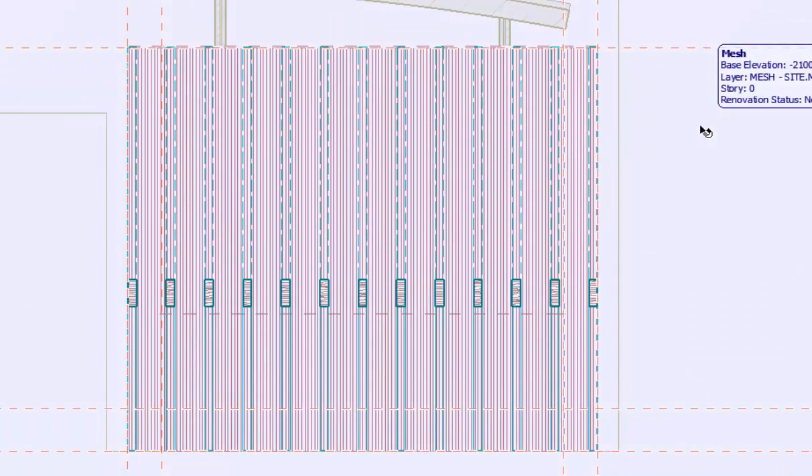Let's go to the ground level, select gallery level, and we're on our roof. We have to go into the section view again. We have to record 3 heights for our 3 support beams.

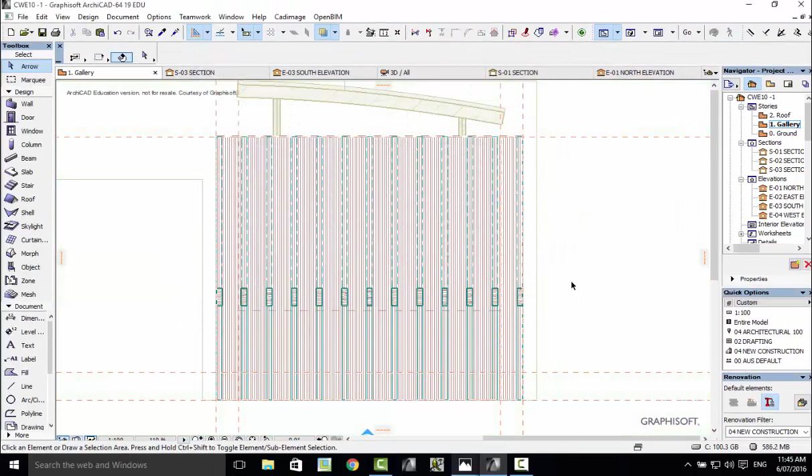Let's turn off the mesh, it's on layer mesh site. So we just go Control L, and mesh site, turn that off, and then it won't be a problem. Later on, we're going to turn off the roof so we can see just the rafters and the walls.

Let's go into our section view, and we need to record 3 measurements. Now we need the support beams to sit in the center of each wall. So we've got one wall, the other exterior wall, and the 4 posts.

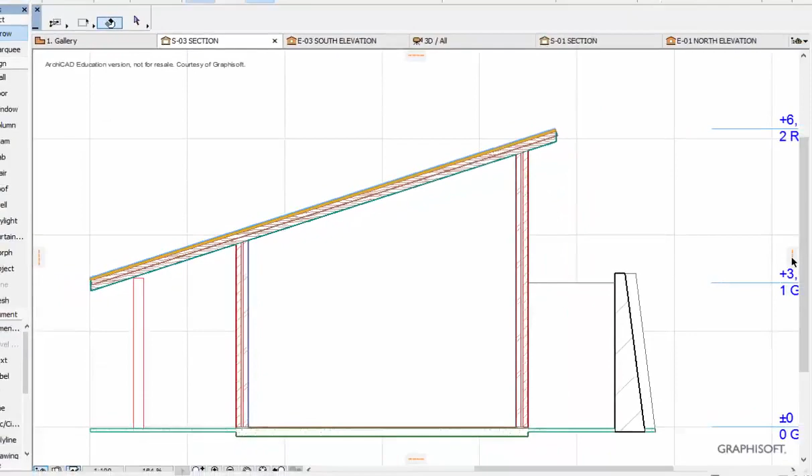Best way to do this is use guidelines. Let's bring in some guidelines and attach them to the outside of the 2 walls and the outside of the post. We need to get a center line.

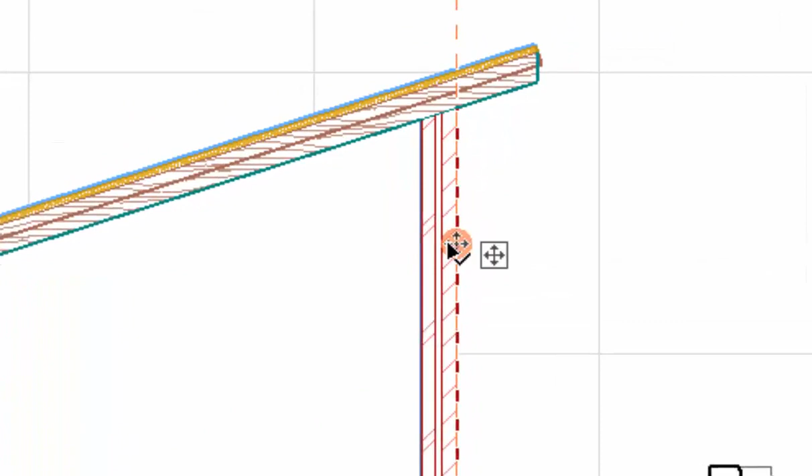If I zoom in a little, just grab the orange dot, and as it goes in, the thickness of our exterior wall is 250. So we need halfway, which is 125. Enter. There's our center point.

Now this one, we'll move this one in 125. There it is. 125. Enter. And the posts are 200, so we need to move this one in 100.

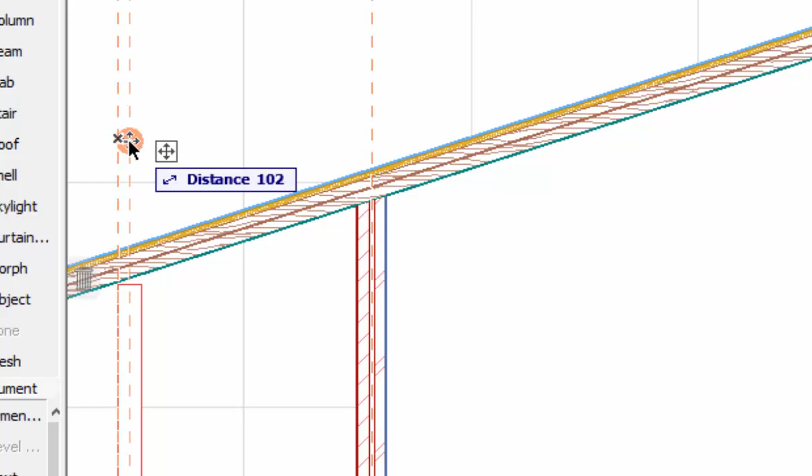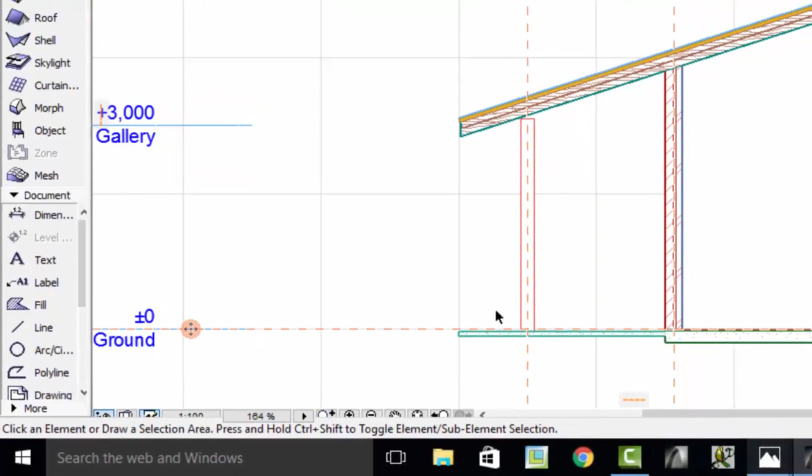Now they're in the center. We've got our ground zero. And just to make things easier, I'll put a guideline on ground zero. Just snap it to ground zero, and it's in place. So now it's easy to take the 3 measurements that we need.

You'll need to record these measurements because we need to do some calculations and write them in. We want to go from the bottom of the roof, which is here. Just zoom in. We need to go from the bottom of the roof. Here we see the bottom of our rafter, and this dark line here is the bottom of our roof. We're going to turn that off in a sec.

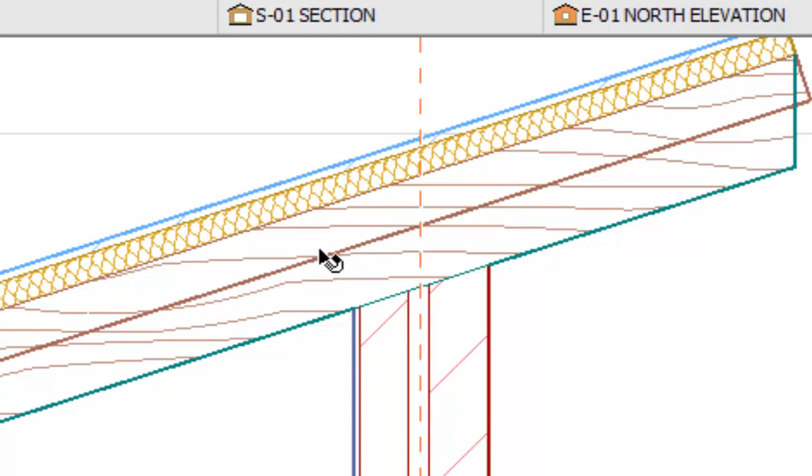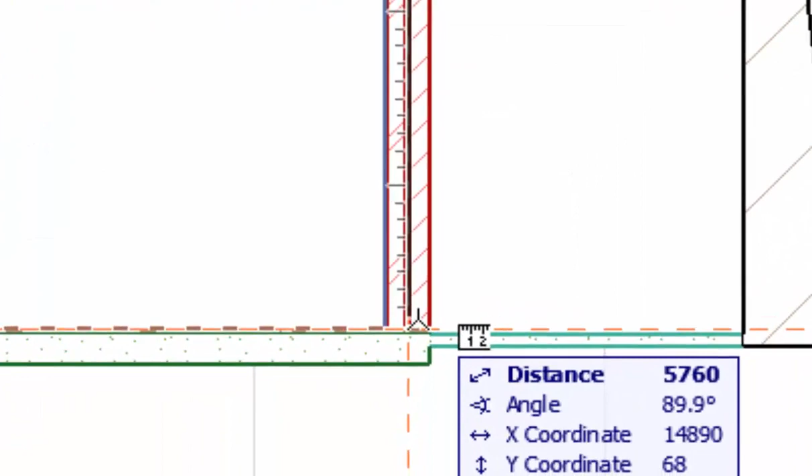Let's grab the measure tool. Go right in the center there and bring our line down. Now notice at the bottom you'll see an eye appear. Once that eye appears, you record that measurement. So it's 5848. Write down 5848. You can click it. All right, that's been recorded.

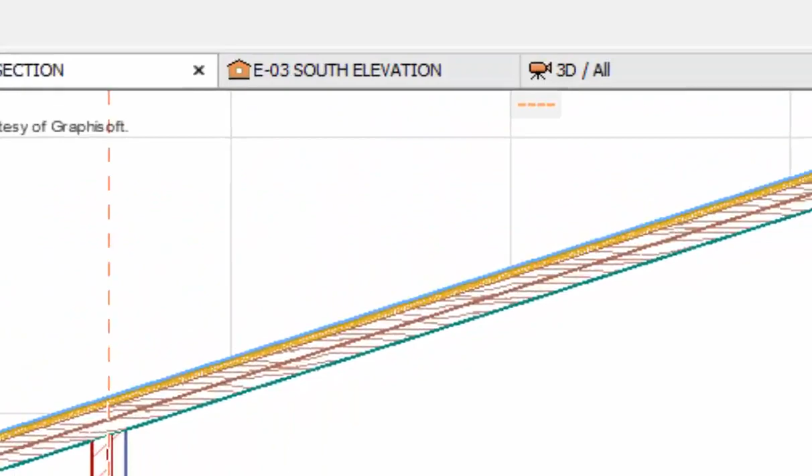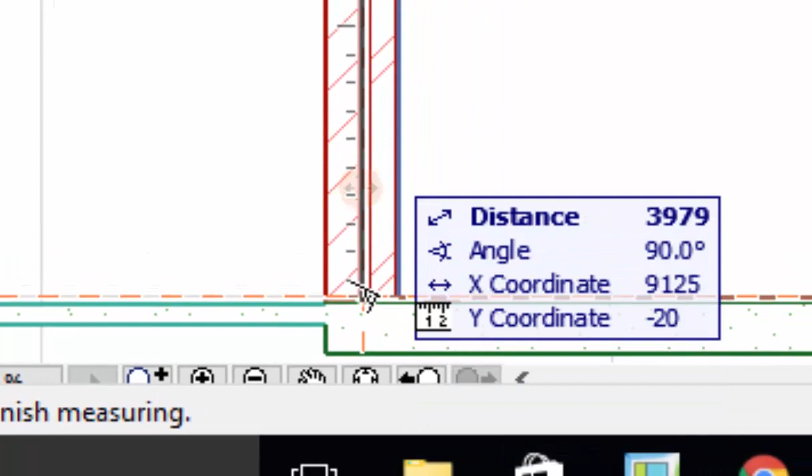Just hit the marker again. And we're going to come down and measure this wall here. We're going to put the second beam on. So hit the measure tool. I'll zoom in a bit. Now right in the center there. And as we come down to the bottom guideline, which is the 0 point, the eye will show. And that eye detects those lines, and it's 3979. So you need to record what the measurement is.

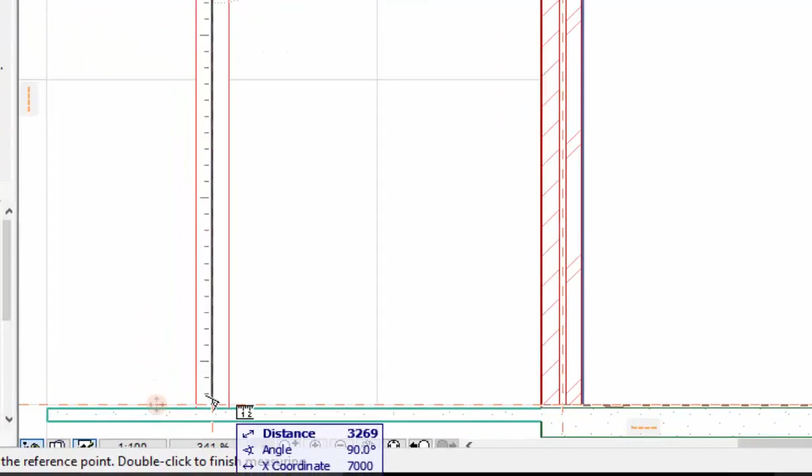Click the tracker again. And the last one here with the posts. Let's hit the measure tool, from that rafter right down to the 0 line. Ground zero is 3269. And we can turn the tracker off.

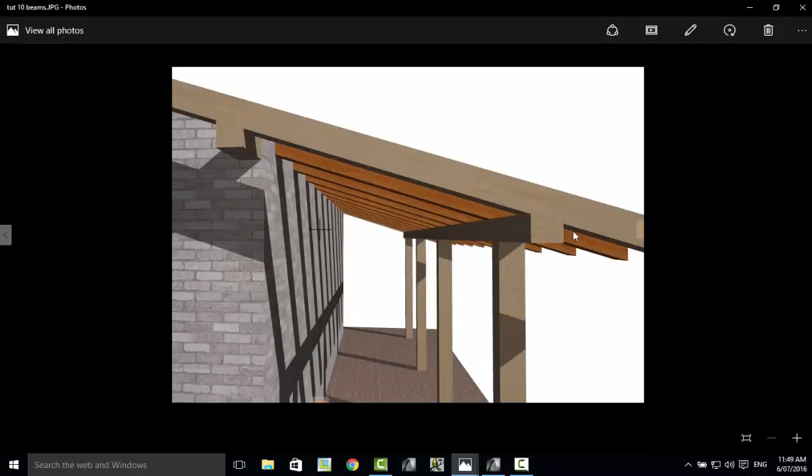Now once we've recorded those, we need to do a calculation. Now we see on here where this beam sits into the rafter, the height is right up here. So we need to do a calculation to get that edge on the edge of the rafter. And that calculation comes out at a minus 100. Already done that calculation, so we just need to minus 100 off each of the heights. And that should give our beam the correct position.

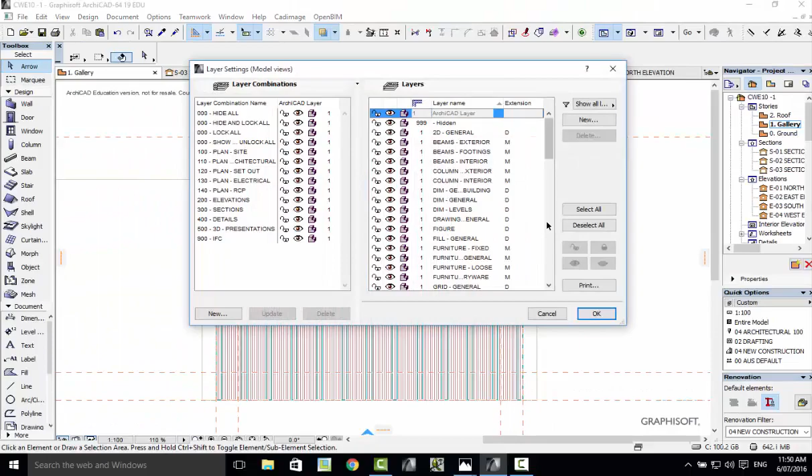So let's go back into the 2D view now. And let's turn off the roof. So if I select the roof, it tells me that the layer is on Roof General. So if we hit Control L, go into the layers, and come down and go to Roof General. There it is, and click the eye. It will turn the roof off, which exposes the walls that we need, and the rafters and the posts.

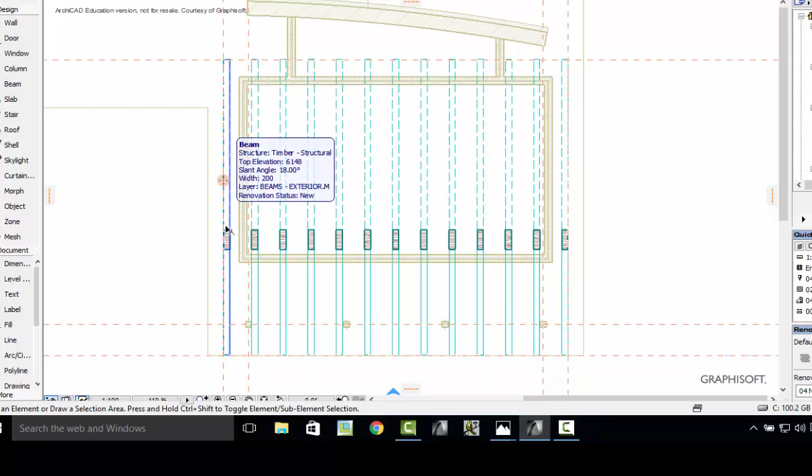You can see the outline of our building and our walls. We need to put some reference lines on here to give us the center point. Here we see some guidelines we already have in place. If you don't have any guidelines in place, then you need to put some on the edge of the outside of the rafter, one there, and one here. We also need to put guidelines in the center of each of the walls, which will give us the center point of where the support beam will go through from the edge of one rafter to the edge of the other rafter. So we need a support beam on this wall, on this external wall, and on our 4 posts.

Let's bring in the reference guidelines. Snap them to the side. Grab a guideline and snap it to the outside. Now we already have a guideline for the center of the posts, which we placed in previously. If you deleted that guideline, just put another one in. It needs to come in 100.

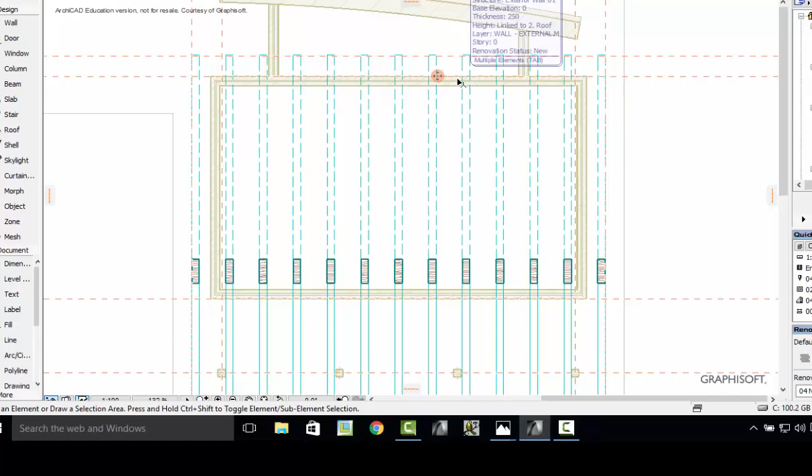We know that our walls are 250 millimeters thick, so the center of our wall will be 125. Grab the orange dot, drag it in and type in 125, enter. And down the bottom here, our line, drag in and type in 125, enter. Now we have our guidelines in place in the center of the walls.

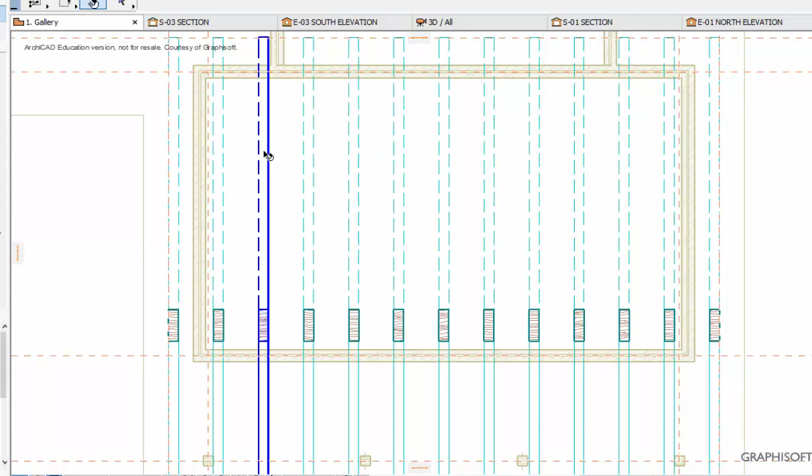We can insert the support beams. We've already adjusted properties for the rafters, and we're going to use those same properties. So let's grab the eyedropper, click on one of the rafters and select it, which opens up the beam tool, and let's adjust the beam settings. Now some of the settings are similar, same size.

The only thing we're going to change is the inclination - it's horizontal, the beam is horizontal. The other thing is there's no offset. We want the line in the center of the beam to be the center of the guideline, so press 0 there, so there's no offset. It's going to be exactly in the center.

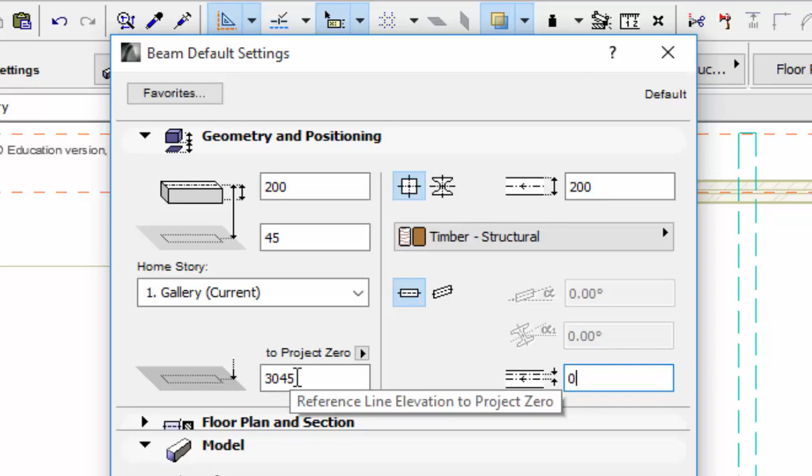The only thing we need to adjust is the height. The first height that we took was 3145, so if we minus 100 off that, it's 3045. So once I've placed that in, everything's good.

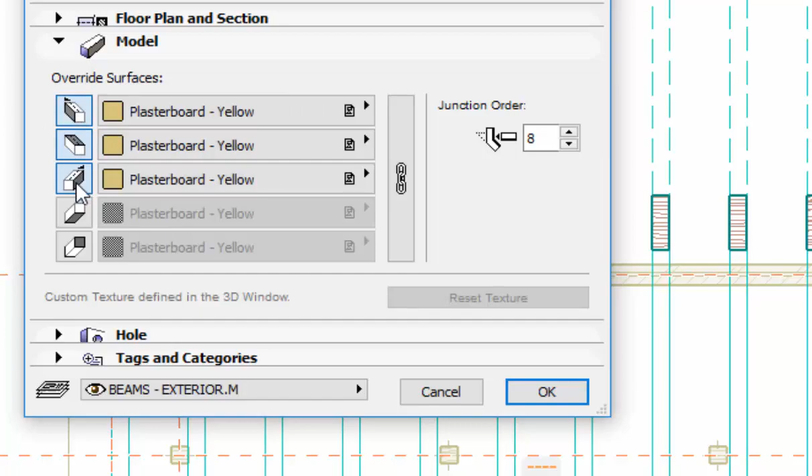The other thing I'm going to do is, because I want the same timber as my roof, I'm going to override all these surfaces. And just in this one, I'm going to select timber, pine, horizontal. I'm going to link them all the same, and I'm going to make my timbers pine. Then click OK. And now when I come into the center line, click, drag my beam right through to the outside of the other rafter.

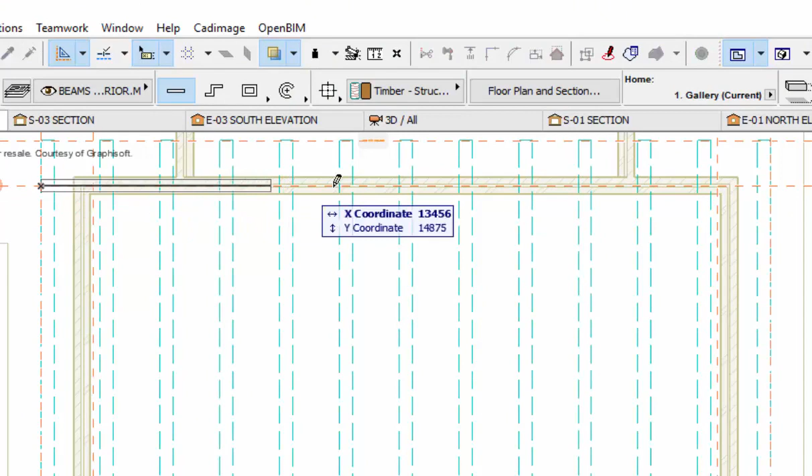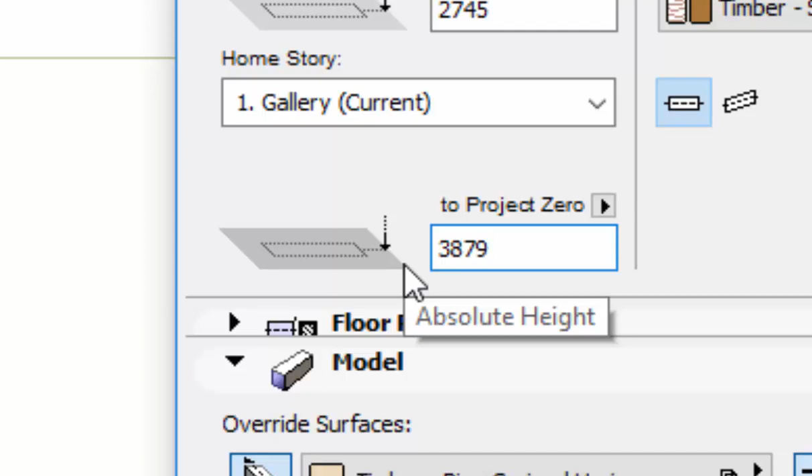Now that's done, we can open up the settings again for the next beam. The next beam was 3979, minus 100 is 3879, which is the height that I took from the section view. Now that that's right, I'm going to leave everything the same, press OK.

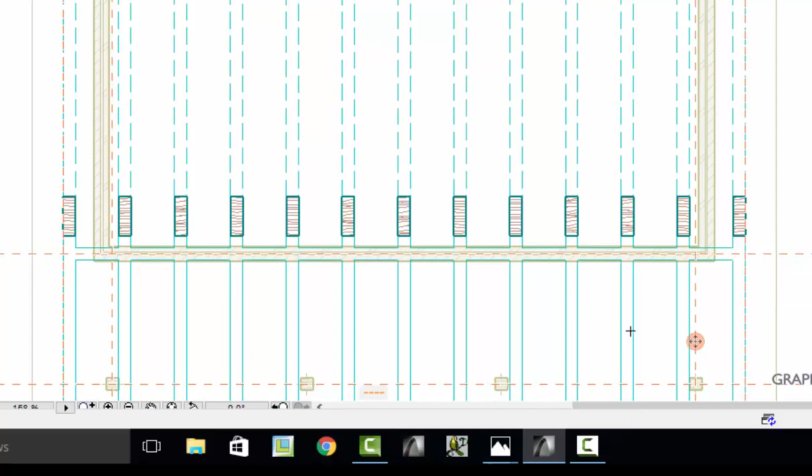And now I'm going to place in a second beam right through to the outside of the other rafter. You'll see the eye will appear. Click. And now I'm going to just zoom up for the 4 posts.

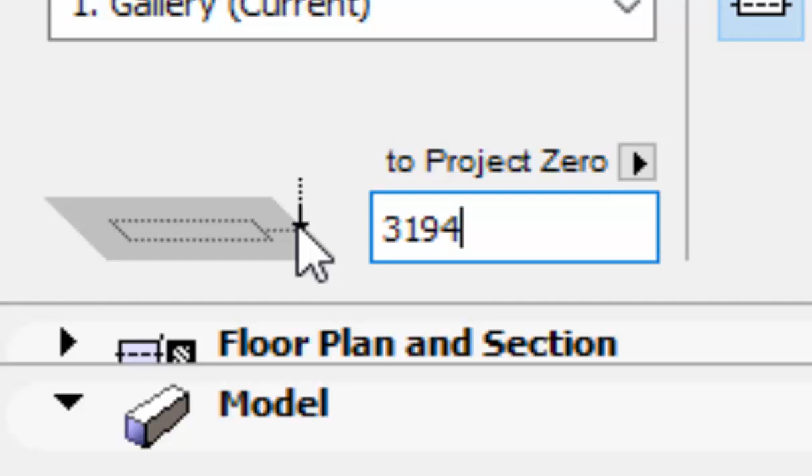Now for the 4 post setting, let's go into the settings dialog again, and we need to change the height once more. That height is 3294, minus 100 is 3194. And we'll go OK. From the outside of the rafter, across the 4 posts to the outside of the other rafter, and click. Now let's go into 3D and have a look.

Okay, let's have a bit of a check. The main thing is that the top of my rafter here, there's no gap and it's not sitting up. So the edge of the rafter is sitting on the edge of the beam, support beam, and it's in place. Notice that it's sitting in the center of the wall.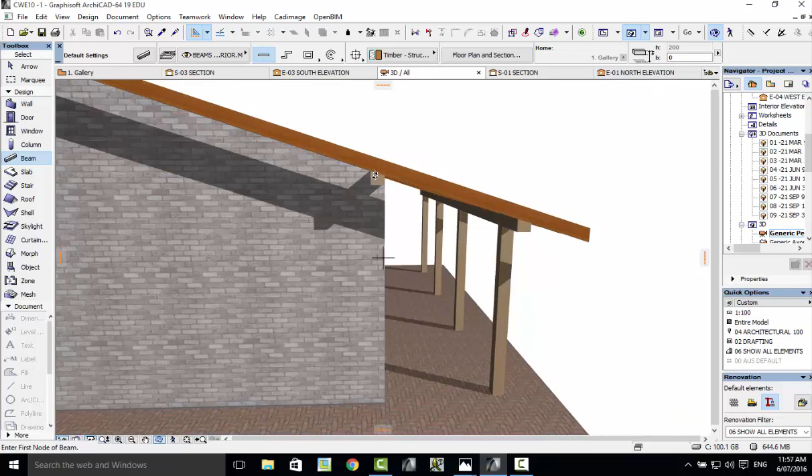That's looking good there. Okay, the only thing we will adjust is the height of these posts. Notice that the posts go up into the timber. Now I need to select the node at the top so the pet palette comes up, and in the pet palette we're going to choose the stretch height.

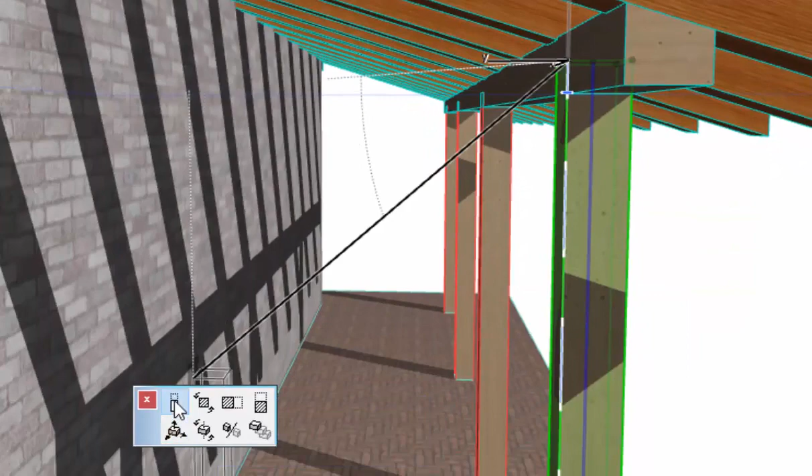And when we come down, if we come out to the corner, the height will come down exactly in line with the beam. Let's move that around so we can get to it a bit better.

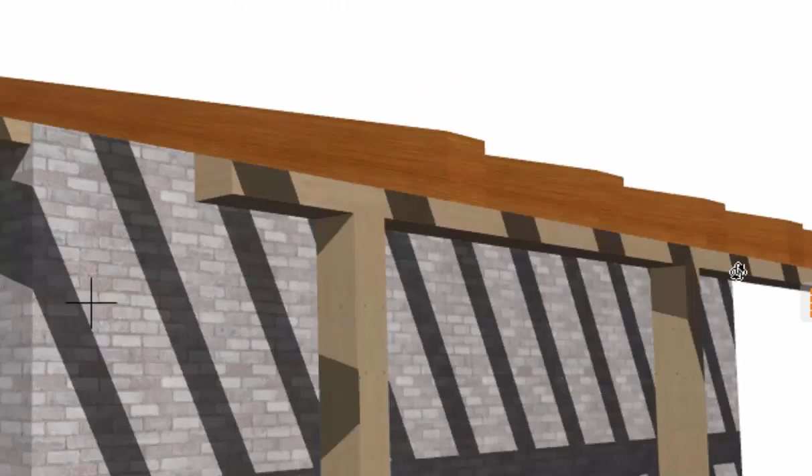So let's select the arrow, select the post again. On the node, pet palette stretch height is selected. If I come down here to the corner of the beam, it will adjust my height to that surface.

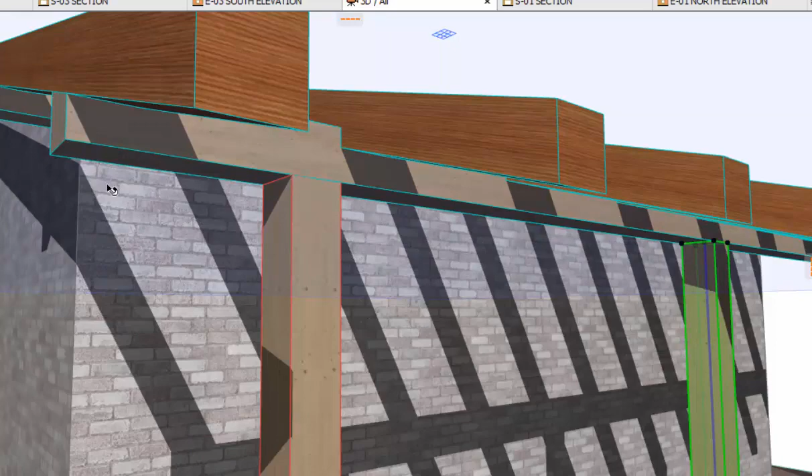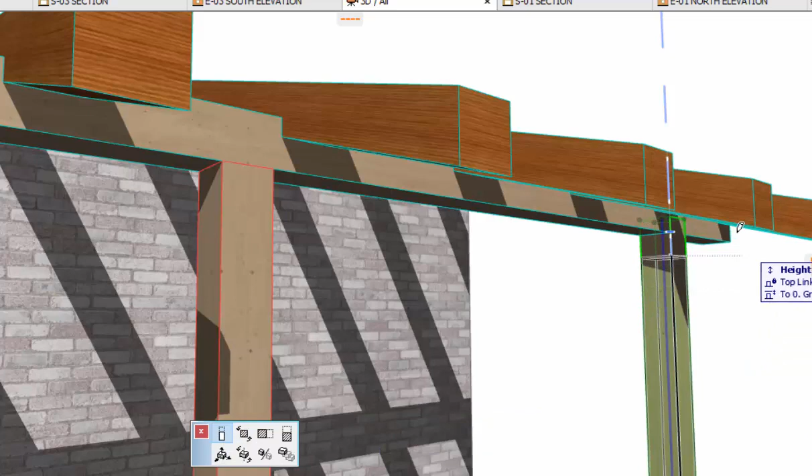And let's go and do these other two down here. Again, I'll select this one, stretch height, and come down to the edge corner of the beam. That adjusts. And this one the same - pet palette, stretch height, just onto the undersurface. If you hit the corner of the support beam, the post will come down to that edge.

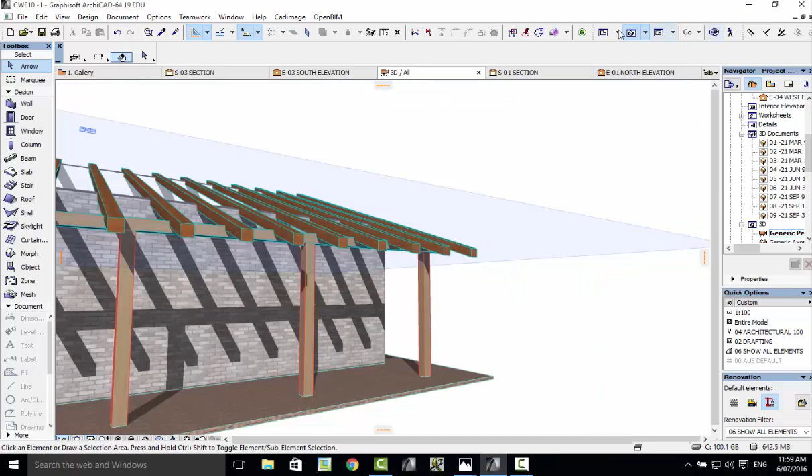And now my posts are adjusted and the support beam is sitting on top of the posts, which is supporting the rafters. So now the beams are in place. Go back into the 2D view. Now let's turn our roof back on. So Control L.

And go to Roof General, turn the eye on, okay. Now we've got our roof on. Let's have a look in 3D.

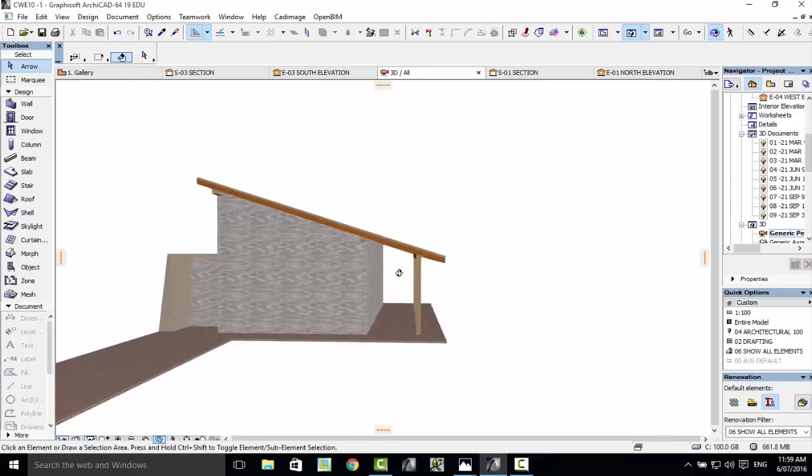There we go. Now we can go on to putting some windows in, and we've got a terrace slab here, handrails, doors, but the outside structure was pretty well done.